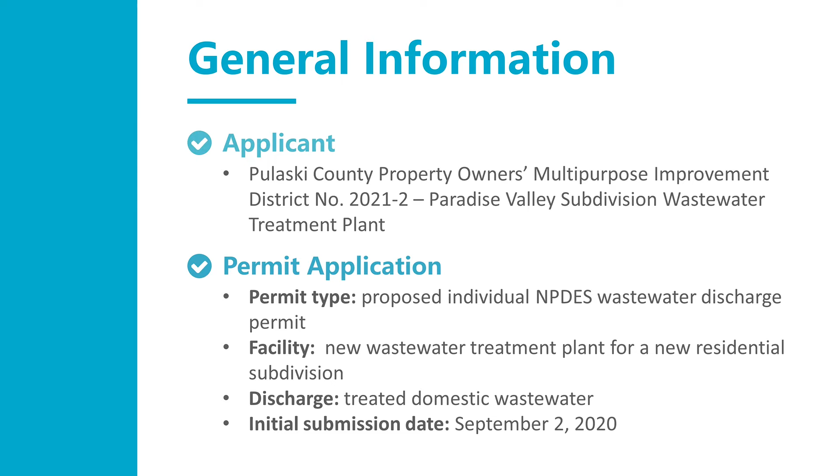The facility that the permit is for would be a new wastewater treatment plant for this new proposed residential subdivision. And the proposed discharge from the facility that the permit would authorize is treated domestic wastewater. DEQ first received the permit application for this project initially on September 2nd, 2020.

So here is listed some facility specifics. The proposed wastewater treatment plant will have a design flow of 50,000 gallons per day with 300 connections to the complete treatment system. The wastewater treatment system at the facility is set to be designed to include components for wastewater treatment, which include a bar screen, a grit removal, a flow equalization chamber, extended aeration activated sludge aeration chamber, 2 clarifiers, a sludge holding chamber, filtration, and chlorine disinfection with dechlorination included.

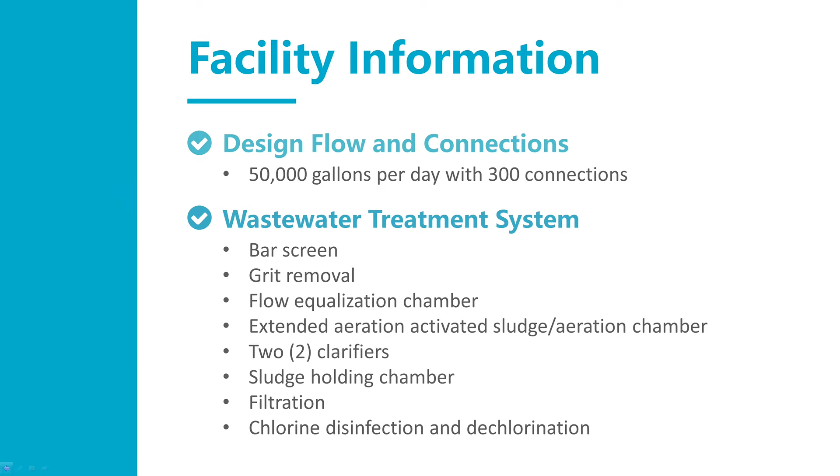So the domestic wastewater from the residential subdivision would flow to this wastewater treatment plant with this proposed wastewater treatment system installed. And the wastewater will then go through this sequence of components to be treated. The plant will be located on Roland Cutoff Road in Roland, Arkansas, which is located in Pulaski County.

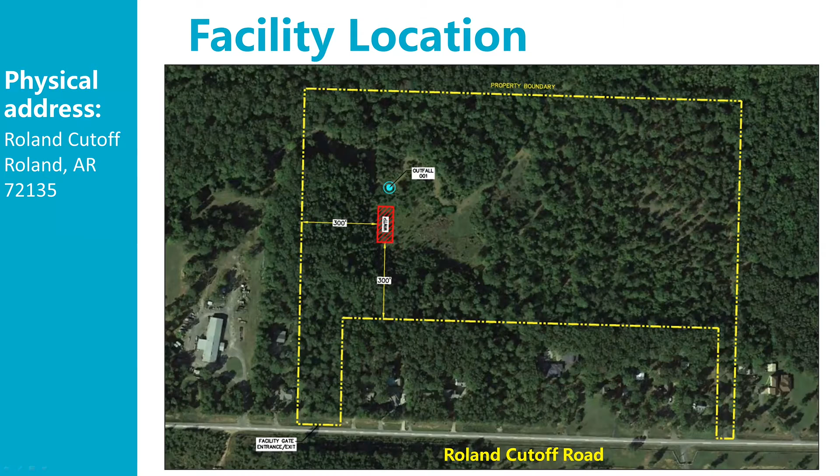And we'll talk about the permit review process in just a little bit, but based on a current review of these receiving waters that you see here, none of these water bodies is listed as impaired for any pollutant or parameter.

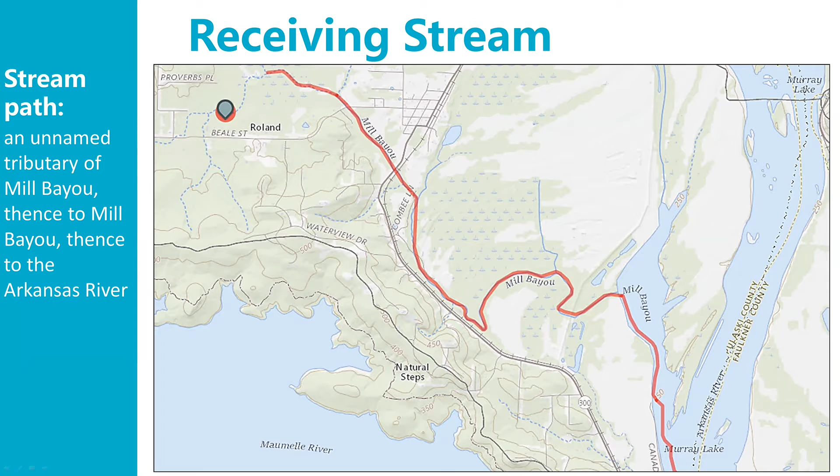And so taking a look at the permit application requirements, as part of a complete application for this individual NPDES permit, the applicant was required to submit a whole host of forms and documentation and information, and that includes DEQ Form 1, location maps, topographic maps, FEMA floodplain maps. Some of the maps shown in this presentation already were from the application itself, like I mentioned.

EPA Form 2E was also submitted, and this is the typical EPA form required for non-municipal domestic sewage treatment works, or NDSTW for short. And those treatment works include facilities like subdivisions, for example, such as this particular facility. And because this facility falls into the category of a non-municipal domestic sewage treatment works, the applicant was also required to submit non-municipal domestic sewage treatment works trust fund requirements.

And this includes a list of additional information, such as a breakdown of operation costs, capital expenditures, a financial plan showing the permittee's ability to operate and maintain the treatment plant for 5 years, a certification that all the information submitted within the materials and the forms is true and accurate, a legal description of the service area, which could be a plat for the service area, a list of the drinking water sources for the service area,

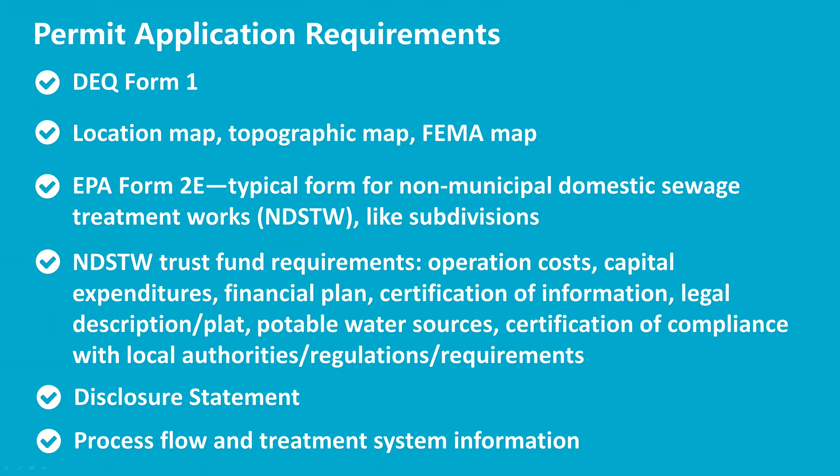and a certification of compliance that the permit applicant has complied with all the local zoning requirements, local planning authority regulations, local permitting requirements, as well as any other applicable local regulations that are required for both the construction and the operation of the facility. The applicant also submitted a disclosure statement, as well as more technical information about the process flow and the wastewater treatment system that the facility will be designed to have.

So as a whole, once the complete permit application was received, the process was followed by these steps that you see here. So first, it involved a thorough technical review of all the received application items, pretty much a lot of the items that you saw earlier in the previous slide with the permit application requirements. And then we also do a technical review of the receiving stream that the facility is proposing to discharge into. We review the stream for any impairments, like I mentioned, or special conditions.

And like I mentioned before, there currently are not any impairments or special conditions that are designated for the receiving water bodies that this facility is proposing to discharge to. The technical review also includes reviewing the facility's proposed treatment system, operator license information, and so on. And very importantly, the review process also includes performing a water quality model. And we'll talk a little bit more about what this model means and what it entails in just a little bit. Finally, after all this information is reviewed, a draft of the permit is written up.

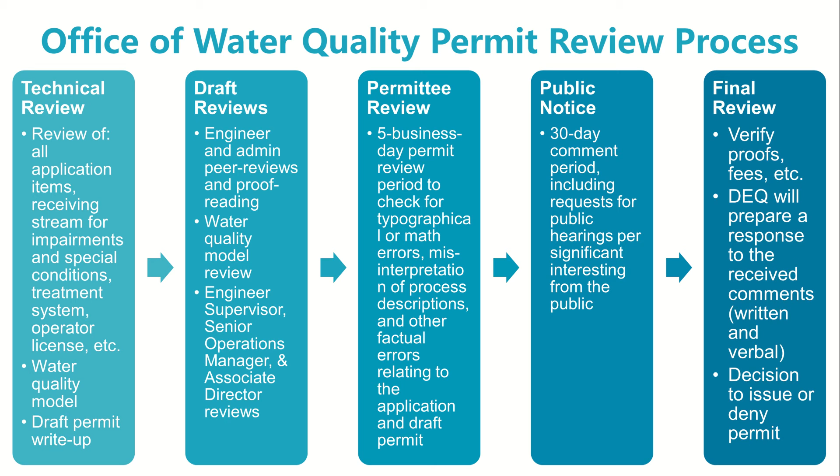And then after some additional information was completed, we received all additional application materials for the permit by January 18, 2022. And because of that, the draft was revised, and that revised draft was then public noticed for a second 30-day permit draft public notice review period. And that's what began on March 6, 2022. And then finally, as a result of that 30-day public notice period, we received requests for public hearings. And that's what is scheduled for May 18, 2022. And so this is kind of where we're leading up to right now.

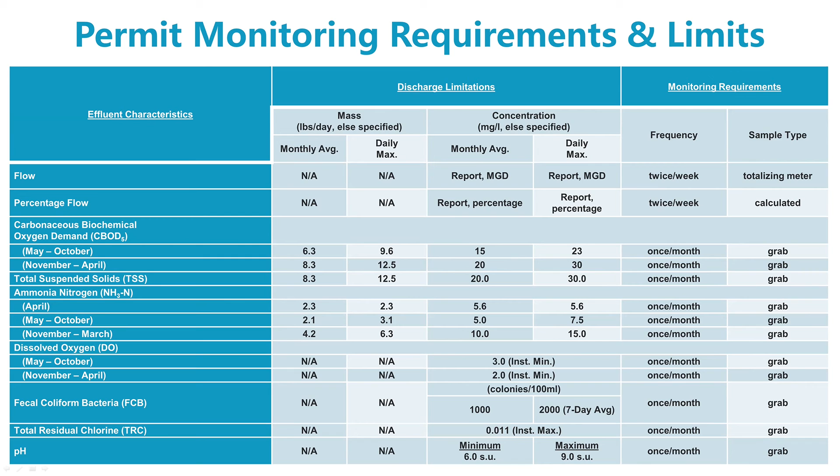So now let's talk briefly about some select permit requirements that are included in the draft permit. Part 2.5 of the permit includes financial assurance fee requirements that the facility would be subject to, since the facility is considered a non-municipal domestic sewage treatment works. And the permittee would be required to comply with all applicable financial assurance requirements, and that includes payment of the required trust fund contribution fees that are specified in Arkansas Code Annotated 8-4-203(b). And as mentioned in the condition, failure to pay these required financial assurance fees can be reason for DEQ to initiate action to terminate this permit

under the provisions in the Code of Federal Regulations, or CFR for short, specifically in Title 40, which is the title that defines protection of environment. And so those specific provisions can be found in 40 CFR parts 122.64 and 124.5(d), and they're adopted in the Arkansas Pollution Control and Ecology Commission Rules 6 and 9.

Moving along, additional permit requirements that are included in the draft permit, and these are conditions of note. These include Part 2.7 of the permit, which includes a provision that limits the number of connections to the treatment system to no more than 300 connections. And any connections outside of that described service area or connections that cause an exceedance of the treatment works' design flow are prohibited without written approval.

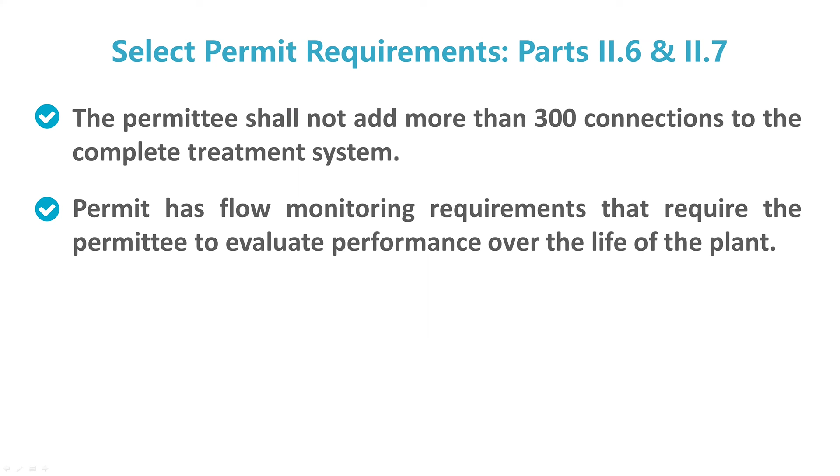Additionally, the permit already has flow monitoring requirements, and it also includes a condition that's listed as Part 2.6, and that requires the permittee to evaluate the performance of the treatment plant as it's used over its life. And that would require the facility to evaluate if the plant is appropriately designed to treat the wastewater it's receiving, even as conditions change, and to make modifications or improvements to the plant as necessary.

Another permit requirement of note is listed as Part 2.9 in the permit, which states that before commencement of construction activity on the site of the wastewater treatment plant, the permittee shall provide a completed Phase 1 cultural resources study for the proposed areas of disturbance necessary to construct the facility. The study shall be provided to both the Arkansas Historic Preservation Program and the DEQ Office of Water Quality. The study must be reviewed and approved by both agencies before ground disturbing construction activities may begin.

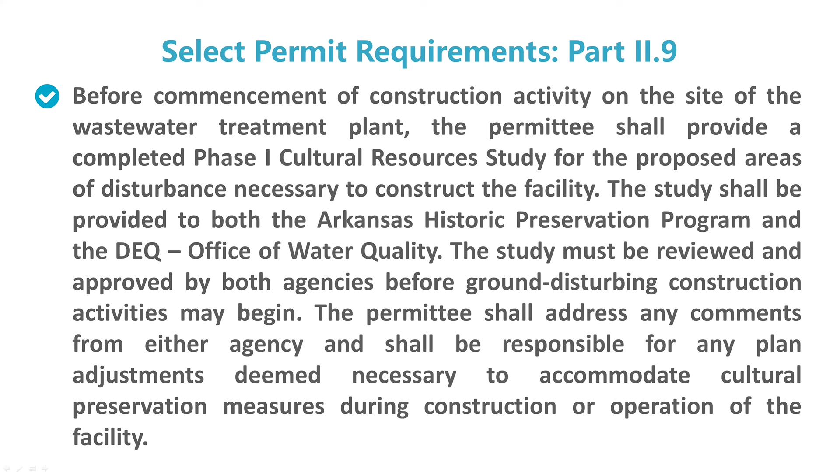The permittee shall address any comments from either agency and shall be responsible for any plan adjustments deemed necessary to accommodate cultural preservation measures during construction or operation of the facility. And ultimately, this condition is a direct result of information that was provided to DEQ. And this was information that indicates that there are cultural resources that may exist in the area. And this condition was placed in the draft permit as a result of these concerns.

Finally, let's talk about what the scope of this permit is meant to be, essentially what this permit is and what it is not. So what this permit is meant to be is an authorization to discharge treated domestic wastewater from this wastewater treatment plant. What this permit is not meant to be is a floodplain permit. It is not meant to be a U.S. Army Corps of Engineers permit. It is not meant to be a zoning decision. And finally, it is not meant to be a wetlands determination.

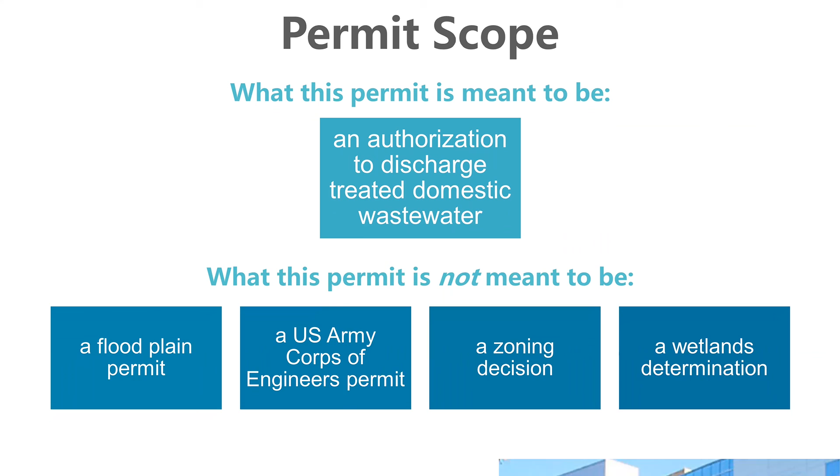And that concludes this informational session. As mentioned in the beginning, the public hearing for this permit will be on May 18th, 2022 at 2 p.m. Central Time. The location of the hearing will be in the commission room, which is located on the first floor of the DEQ headquarters building in North Little Rock, Arkansas.